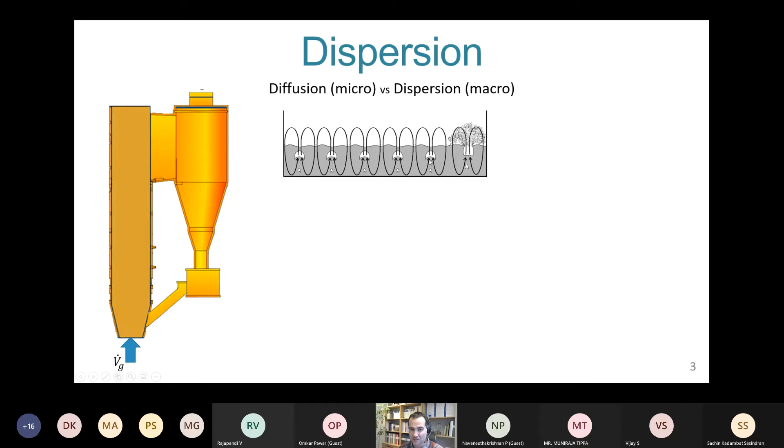Again, the scales are completely different. One is microscopic, the other one is macroscopic. But it's an important concept to have with us. It's dispersion. And dispersion is created here, as you see, by convection. These are convective flow patterns. But since they are repeated and they are stochastic, they have the same probabilities to go on each side, then it becomes like a random walk. So it's the sum of stochastic convection, so to say, but also there is, of course, some diffusion, but diffusion is completely negligible in front of this macro scale.

So very much like diffusion for the microscopic scale, we can use the Einstein equation to calculate this coefficient governing this mixing. It's a diffusion coefficient for gas diffusion, for example, or fluid diffusion. But now we are speaking dispersion, so we will call it dispersion coefficient. But indeed, the equation is the same. So you have here a certain characteristic time between these cycles or between these events, and you have a characteristic length. At the microscopic scale, again, it's the mean free path. But here at the macroscopic scale it is the size of these structures, which are repeated.

As I warned yesterday, I'm starting to lose my voice.

Good, then the Einstein equation tells us that the coefficient, diffusion for microscopic scale, dispersion for macroscopic scale, reads something like this. It goes with the square of this characteristic length divided by the characteristic time. And units are, as you know, for diffusion coefficients, square meters per second.

And this is very useful because if you have data, for example, if you know how a particle is moving at this macroscopic scale, and you have enough good statistics, you can simply calculate how much, over a certain time, this particle has displaced. If you have enough data points, you can calculate the dispersion coefficient, and with enough good statistics, enough good data points, you can then estimate a dispersion coefficient.

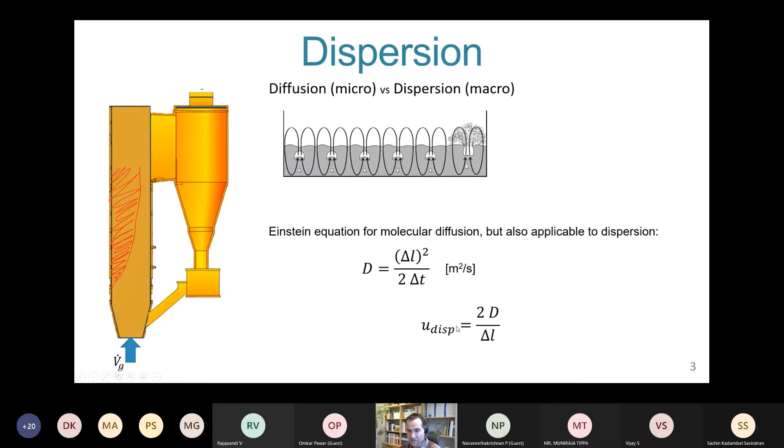So before we move on, the Peclet number, that's a dimensionless number, which is comparing the weight of these two terms. How important is convection in front of dispersion? So it's the ratio of the two. Convection is characterized by a velocity, of course, and dispersion needs to be characterized by some kind of velocity too, and that's the dispersion coefficient divided by L, and this is in line with what we saw in the former slide here. You see D divided by L. That gives you a characteristic velocity for the dispersive mixing. So with the Peclet number, you can easily say which of the two will be governing, or if you can even neglect one of the two, for example.

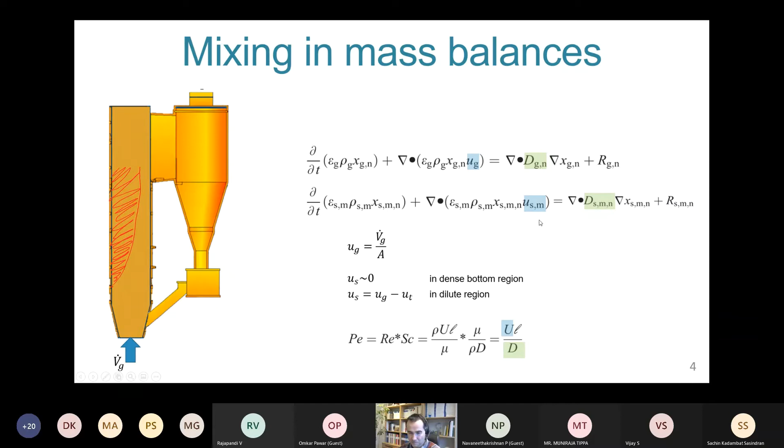And before we start looking at the mixing of different phases, one last concept I very much want to introduce for you, I think it's very important, is that of the Damköhler number. It's again a dimensionless number. And it compares the kinetics and the transport. And why is it useful? I will try to illustrate it with this example. So in a fluidized bed, we would feed fuel from the side wall. This is the fuel port. So the combustible, the fuel, will be injected from a certain location. It's a punctual injection. While our oxidizer is homogeneously fed, spread through the whole cross section.

And this tells us about the challenge then. We want all this fuel to meet all this oxygen. And that may be relatively easy for small units, of course. But if you imagine that these are several meters, 5, 6, 7, even 8 meters, then we start having a challenge here, because the fuel will fall here. It will start oxidizing, and maybe it has converted before it reaches the other end of the unit. This is not a desired situation, because then here we would have a lack of oxygen. We would have no oxygen here, because it has all been consumed by this fuel. While here we would have a lot of oxygen, which is not meeting any fuel at all. And this is an undesired situation.

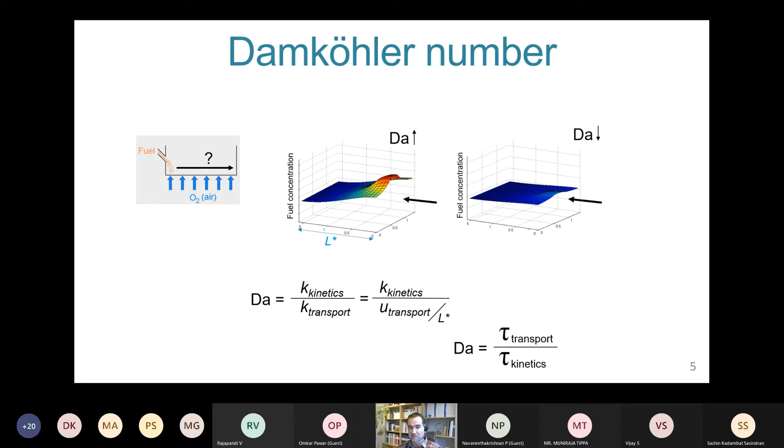So this was the introduction. I will just end by exemplifying a bit more how we apply this in practice. And we can do this with some modeling that we have done. This is modeling of biomass combustion in this case, but it would apply to coal, peat, waste, any other fuel.

The basic principle is that for any solid fuel, you have mainly 3 fields that will be converted in the fuel, and that is moisture, volatile matter, and the char. And the moisture is released very fast, so the kinetics are very fast. So I've tried to illustrate this by this bar. The volatiles release is relatively fast, but not as fast as moisture.

And finally, you have the char combustion or the char conversion, and this is much slower in terms of kinetics than the moisture or volatile release. So we have a low bar here. The mixing rate of the fuel we will assume to be more or less the same for the three.

Of course, the particles, as they release moisture and volatiles, as they convert the char, will change their properties and the mixing rate can change somewhat, but as a rough assumption, we can assume them to be constant. So which combinations do we have? We have some mixing rate, which is constant, but the kinetics for each one of these processes differ strongly.

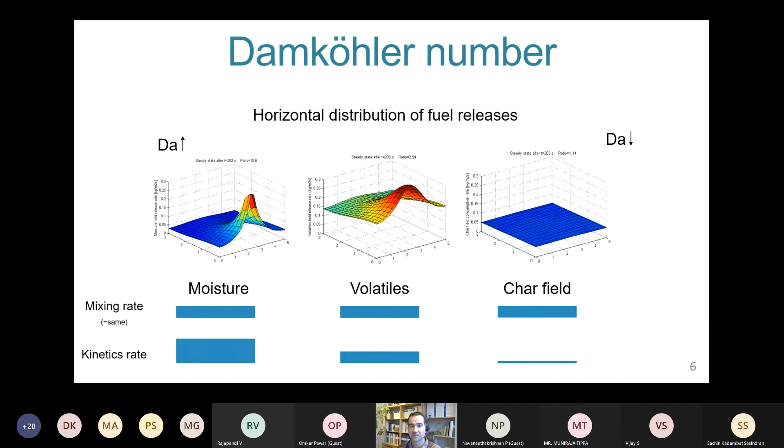Good, these were 3 basic concepts then, dispersion, including the Peclet number, and then we had the Damköhler number also. And now we move on to the second section here today, and that will be solids mixing. So first of all, instead of just feeding you with material and data points from literature, I would like to first make a short reflection. What is the role of these things?

Why is the mixing of bulk solids important? Why care at all? Well, in the first place, it can be because they are active materials and they need to be active parts in different reactions, heterogeneous reactions. Typically in a fluidized bed, it's the fuel that is the solid that has to react, that is mainly responsible for heterogeneous reactions. But sometimes the bulk solids, the fine material, is also reacting, is also active.

We have, for example, for coal combustion, sorbents which take care of the sulfur capture. These are typically carbonates; calcium oxide needs to capture SOx, sulfur emissions, and turn into calcium sulfate. You can have catalysts, for example. You can have oxygen carriers in order to improve your oxygen distribution and so on.

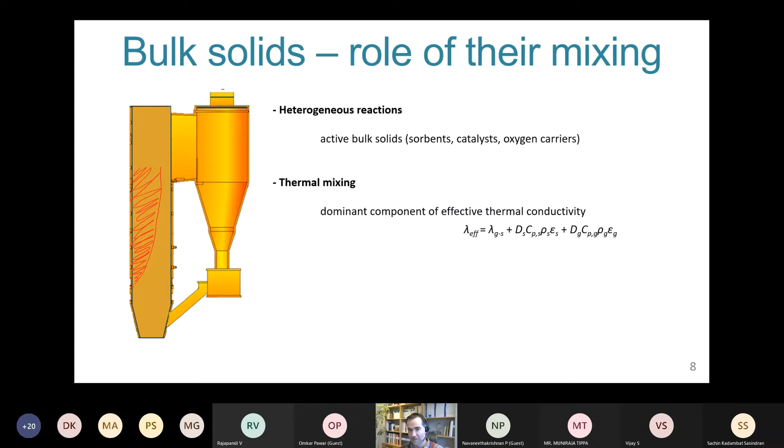Then we would have combustion. At this point, temperature would rise, and we would have this exothermic combustion process that would raise the temperature of this flow. Well, there is no mystery here. You can calculate the numbers for this adiabatic temperature and so on.

The heat released here by the combustion is the same, but now it goes to not only heating up the gas flow, but also heating up the particles. And that is a lot of mass compared to that of the gas. That means there will still be a temperature increase, but it will be very small, much smaller than in the absence of particles. And this is called the thermal flywheel effect. You give the whole system a heat capacity through this mass of solids, which is much larger than the mass of gas.

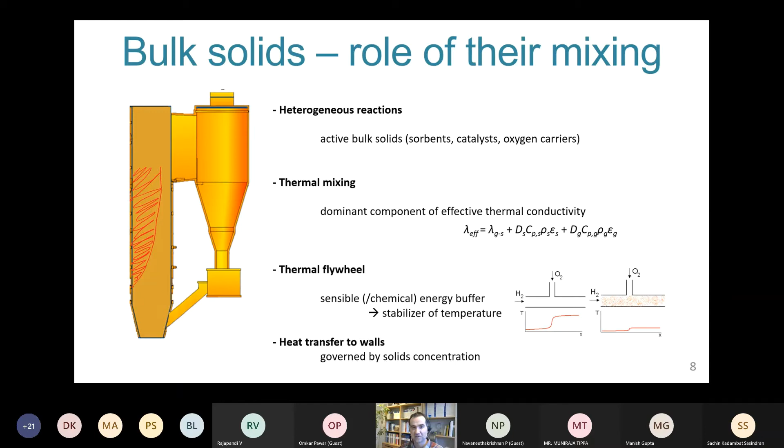Now that I hopefully have convinced you about the importance of the bulk solids, we can look at how the mixing looks like. You may recognize this picture from a former lecture. These are the mechanisms for this solids mixing. Again, dragged up by bubbles, and because of a mass balance, if the solids get dragged up here, they need to come down somewhere, and they do that here. And you can identify several of these so-called mixing cells aligned besides each other, so to say.

So this is in the bottom region, and then as we discussed earlier, if you have a lot of these mixing cells aligned over a cross section, then you can describe this as a dispersive mixing of the solids. So what you will find in literature if you look for solids mixing are dispersion coefficients. And the background to that is that the solids mixing follows this pattern in the lateral, radial, horizontal direction.

Good, then we'll look here at what the literature says, and here is a very nice review from Breault. And what we see is that this lateral dispersion coefficient increases with the Reynolds number. This means with velocity. And we have different works in literature. And what you see is a logarithmic y scale, and this is telling us about how little we know and how complex the phenomena is.

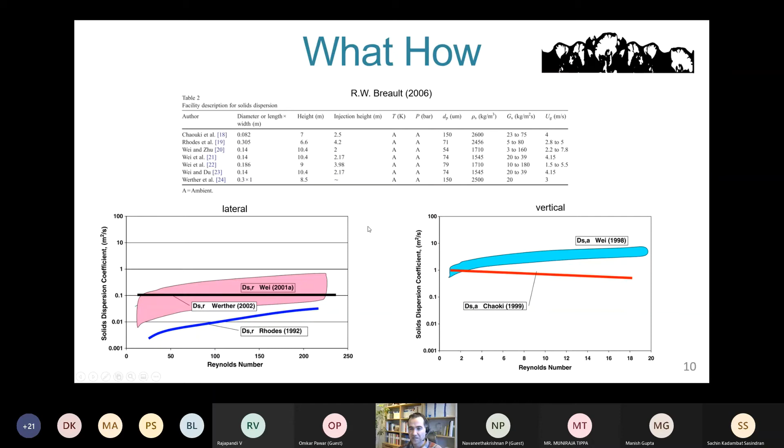Good, we go on with the fuel mixing. And first I would like to feed back to what I was saying in the beginning with the Damköhler number. Here we have at the Chalmers boiler 2 concentrations of CO. So CO is a result from volatile release and also from char conversion. And here we have one case with 100% coal and one case with 50% coal, 50% wood.

Otherwise, the rest is the same. The bulk solids are the same, the fluidization velocity is the same, the bed height is the same, the geometry, the unit is the same, temperature is the same. So what do we see here? If we are feeding from this location, why do we see this maldistribution when we are combusting biomass? And why does it look more well distributed when we are combusting coal? Well, there can be 2 reasons for it, and it relates again to the Damköhler number.

Biomass converts faster, is more reactive. The char in biomass is more reactive, but mainly the content of biomass is volatile matter rather than char. And volatile matter, as we saw before, releases very fast. So this means that the kinetics for biomass will be much faster. Given the same mixing, if it mixed equally fast as coal, it would have stopped converting at a certain penetration much shorter than the one for coal because of this difference in kinetics.

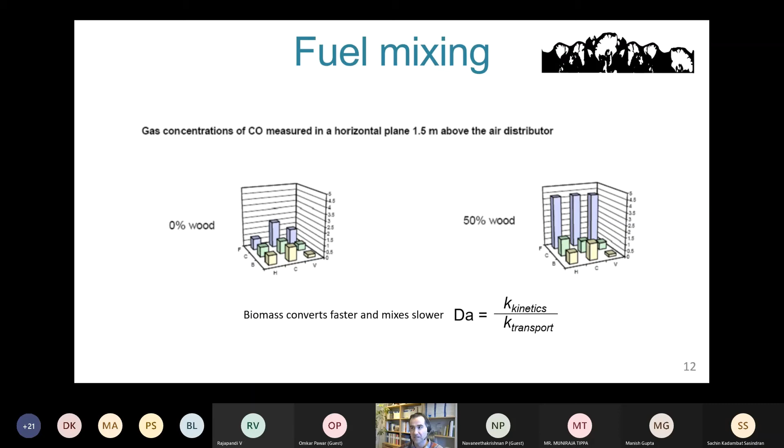This is another work by Sette and others, and he showed, looking at data from literature, that there was an effect of the cross-sectional area of the bed. So not only bed height and velocity, but how large the unit is. The larger the unit in which experiments were made, the higher the dispersion coefficient. And again, we see large variations for a given unit, but a clear trend of increasing dispersion coefficient with unit size. Here we see 3 orders of magnitude in difference.

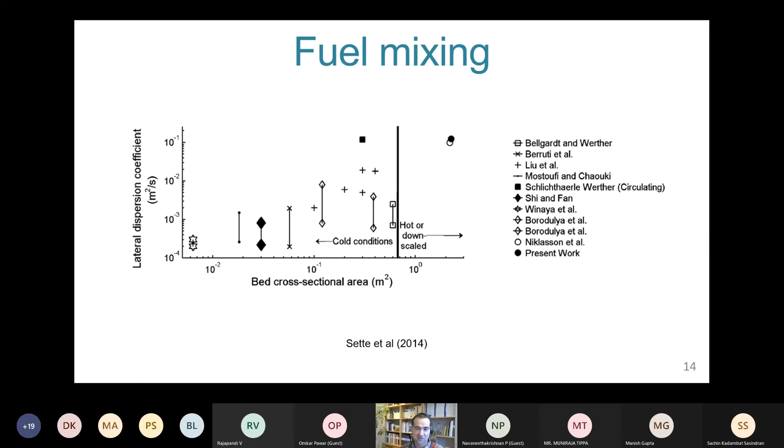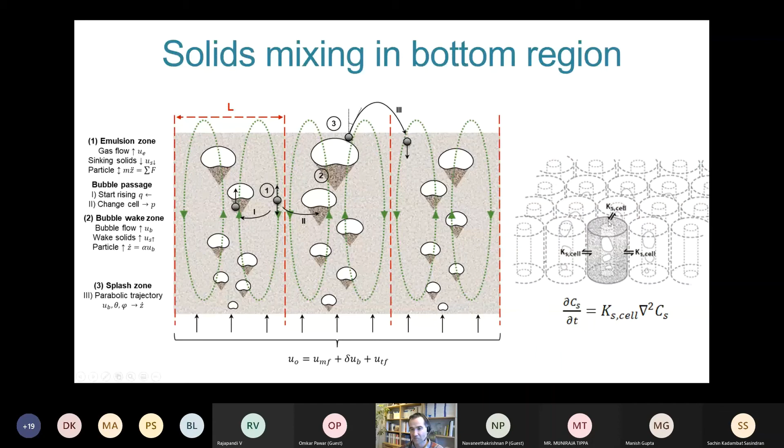And finally, the largest units, in the scale of some square meters, reach lateral dispersion coefficients of about 0.1. This is for the lateral direction of the fuel, and it can be described through these dispersive patterns, and we have seen why before. They follow the same pattern as the bulk solids, a random walk on a macroscopic scale. So then it is dispersive.

But what happens with fuel in the vertical direction? Is it dispersive? Well, it is not, because the dispersive or diffusional nature of mixing means that if you waited for steady state, everything would be well distributed. There wouldn't be any concentration gradients in steady state. But we know from experiments that fuel particles in a fluidized bed tend not to distribute themselves homogeneously in the vertical direction. So we cannot use dispersion to describe the mixing of fuel in the vertical direction. I will try to explain a bit more on this.

So fuel particles would experience forces. Of course, there is the gravitational force downwards.

There is a buoyancy upwards, so light fuel will tend to be flotsam and not be immersed in the bed. But then there is also a drag from the bed material; all these fine solids will drag the fuel in different directions and so on. So it's a number of forces that act on these fuel particles, and that will tell us whether the fuel will be well spread through the bed, or it will be flotsam, or it will be jetsam. Sometimes it's just immersed in the bed the whole time and it never comes to the surface.

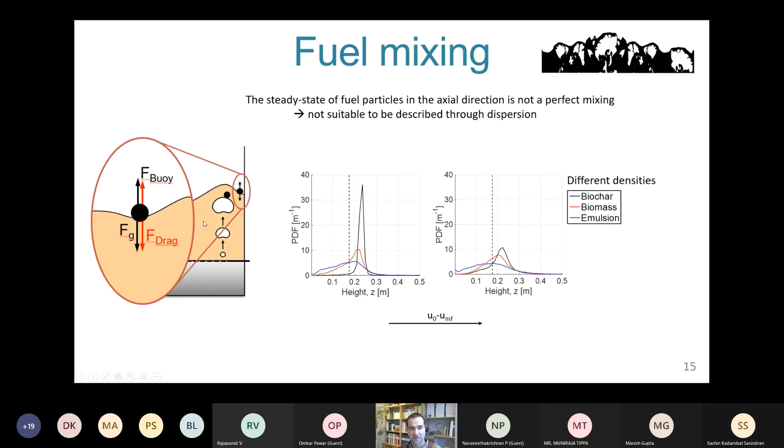And this is important because if you have, for example, catalytic agents, or if this is a coal particle and you want to make sulfur capture, the sorbent is inside the bed. If you have your coal particle floating here and releasing all the sulfur up, then the sulfur will never meet the sorbent, and you will have a hard time capturing the SOx, the sulfur oxide emissions. But if you manage to have your coal particle immersed at least part of the time, then these sulfur oxides will meet the calcium oxide and be captured by it.

So, approaching then the gas mixing, here I would like to again recall the concepts of diffusion and stochastic convection. If we inject a tracer gas at some location, and we have a gas flow going up, we will see that after a certain height the tracer has a certain distribution like this. If you compare this distribution to the microscopic diffusion coefficient of the gas, it will not be in agreement. The microscopic diffusion should give a much more narrow distribution, but what we see from experiments is a wider distribution. So it cannot be explained only by diffusion. It has to be explained by, again, stochastic convection.

So what happens for a gas? We will have fluctuations in the lateral direction of the convective flow, and these fluctuations are stochastic. They can be described in a relatively random way, a random distribution, so to say. It's called stochastic convection. What we see here is a sum of the two effects. On the macroscopic scale, what we see is mainly stochastic convection, but while this plume of gas is in this case going to the left, it also has diffusion inside it. So what we see is the contribution of both. When you have hundreds of these plumes together, they sum up to this distribution that we measure up here with time. The result of both is what we call, again, dispersion.

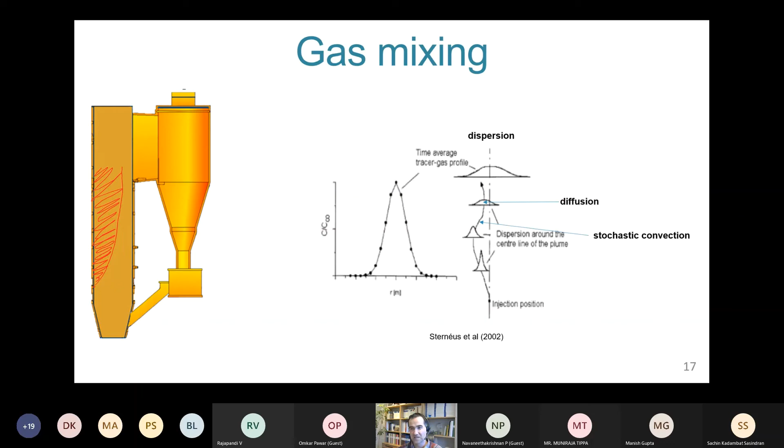Then a distribution of this local injection, and from this you have, of course, the time, because you know the velocity of this gas flow, and you know the spread, so this characteristic length, and from this you can calculate dispersion coefficients with the expressions I gave you in the beginning of this lecture. And this is done in literature, and this leads to these data points.

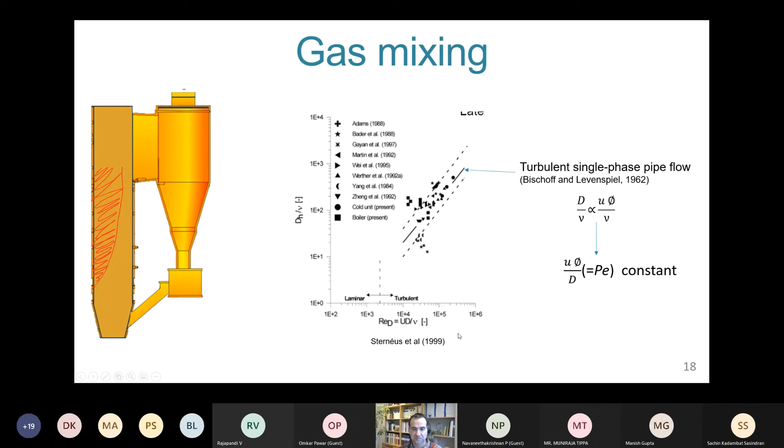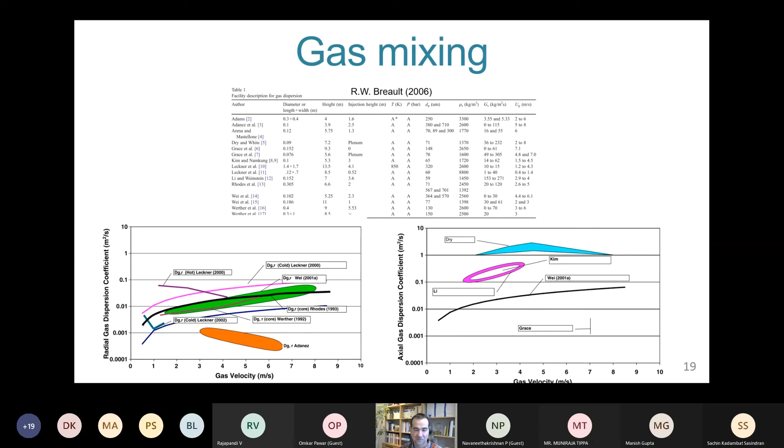Well, here I have provided you for solids, fuel, and gas in both directions information, values, references for how to calculate the mixing. But I would like to end with a remark, and unfortunately, the remark is that life is not always as easy as it seems. And here I have an example for this. This illustrates the fluctuating nature of the gas solids flow inside circulating fluidized beds. And this will help us understand the complexity of it all.

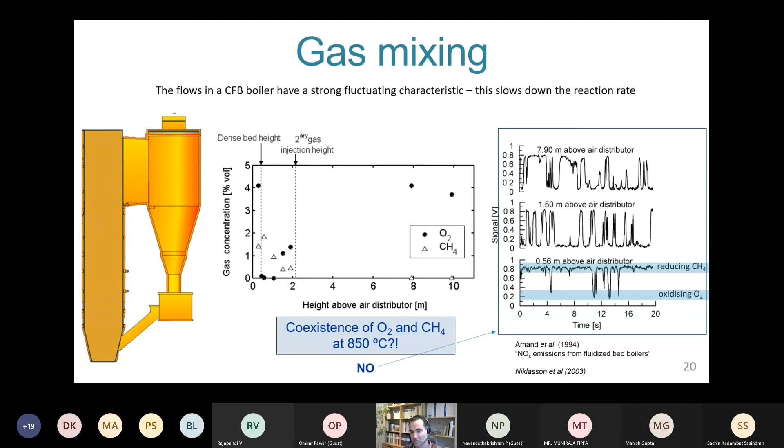But if you do easier modeling with only mass balances, which are not necessarily transient ones, then you need to modify your reaction rate for the homogeneous reactions to account for these fluctuating effects. If you have the reaction rate as the kinetic rate found in the books, then you will never have oxygen and methane at the same place. Instead, if you want to force that, you need to account for fluctuations and limit your reaction rate based on this effect.

And that was it for today, for this lecture on mixing. I've tried to introduce some concepts: dispersive mixing, what we mean by it, how it relates to convection and to diffusion. It's mainly stochastic convection. Also the Peclet number and the Damköhler number, what they tell us about the mixing. And then some literature data and explanations for solid mixing, fuel mixing, and gas mixing in both directions, the axial vertical direction of the flow, but also the radial horizontal direction, which is typically the critical one in this kind of boilers.